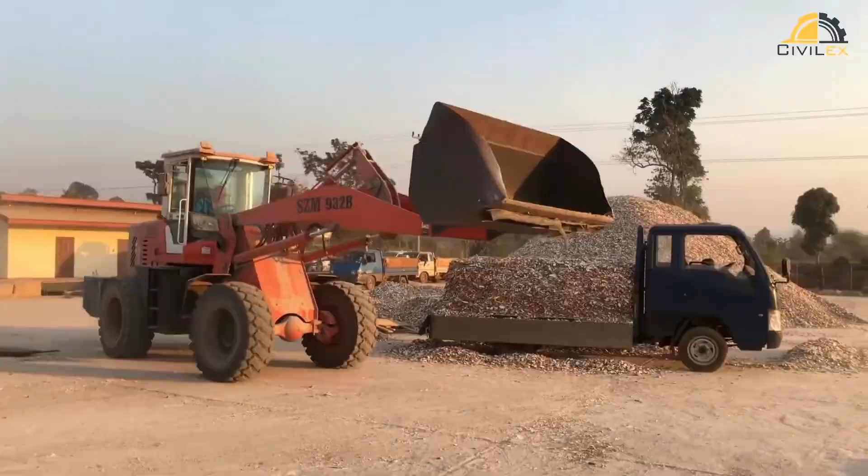At the same time, there is another serious issue, which is plastic waste. Malaysia produces over 1 million tons of plastic waste every single year. Unfortunately, only around 24% of this waste is recycled. The remaining plastic ends up being burned, dumped in landfills, or worse, leaking into our rivers and oceans, where it causes long-term damage to our ecosystems.

Okay, in response to these findings, our group identified a key focus area where we can make a difference: material reuse and waste reduction, an approach aligned with circular economy principles. This focus area addresses two critical waste streams at once. First, construction waste, by rethinking the materials we use and replacing traditional bricks. Next, plastic waste, by incorporating recycled plastic into the building process.

The concept we propose is the use of plastic waste bricks. These are not only practical, but also promote circular use of materials. Here's how: they reuse non-biodegradable plastic, which would otherwise go to waste. They help reduce the pressure on landfills and prevent harmful plastic leakage into the environment.

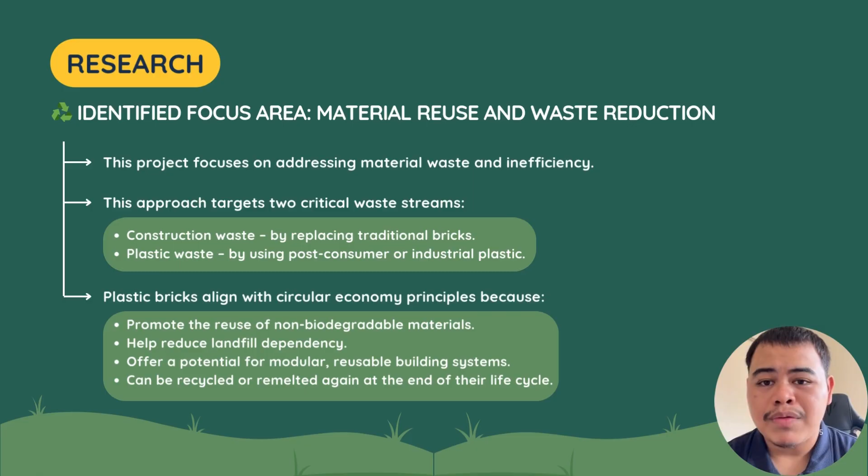And perhaps most interestingly, they can be designed to be modular and reusable, meaning they can be taken apart and used again, or even remelted into new forms at the end of their life cycle. In other words, plastic bricks help us close the loop, keeping materials in use for as long as possible.

Our investigation revealed two interconnected challenges that the construction industry in Malaysia must urgently address. First, the industry's over-dependence on traditional materials like cement and clay bricks. These materials require high amounts of energy and resources, are associated with large carbon emissions, generate significant construction and demolition waste, and depend on non-renewable resources.

Second, the country's growing plastic waste problem. With more than 1 million tons of plastic waste produced annually, we are recycling far too little of it. The rest is either burned, contributing to air pollution, dumped in landfills, taking centuries to degrade, or leaks into waterways, harming wildlife and contaminating ecosystems. This paints a clear picture, which is that unsustainable practices are deeply rooted in the way we build and discard materials.

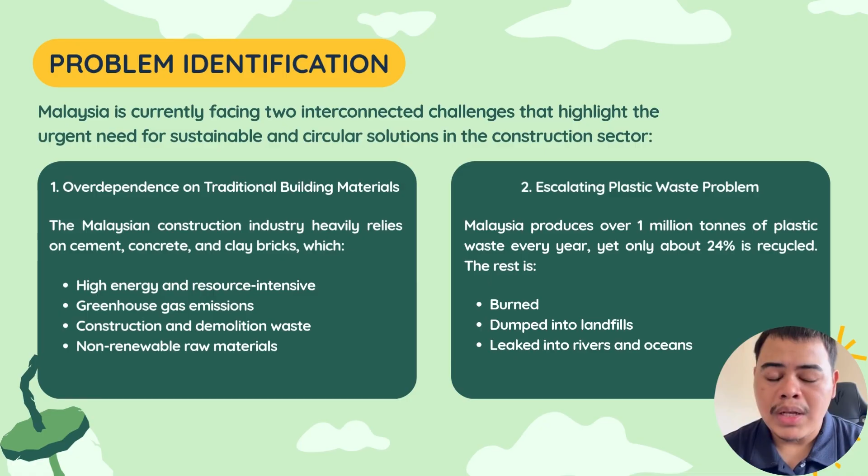So, what's the solution? Our team believes that one powerful response lies in plastic waste bricks, an innovative idea that tackles both material waste and environmental impact at the same time. This solution supports circular economy principles, where waste becomes a resource, not a burden.

By adopting this approach, we are not only helping to solve Malaysia's plastic problem, but also reducing our dependence on energy-heavy traditional materials. It's about building in a smarter, cleaner, and more sustainable way. Plastic waste bricks are more than just an idea. They are practical, scalable solutions that can transform how we build and how we protect the environment.

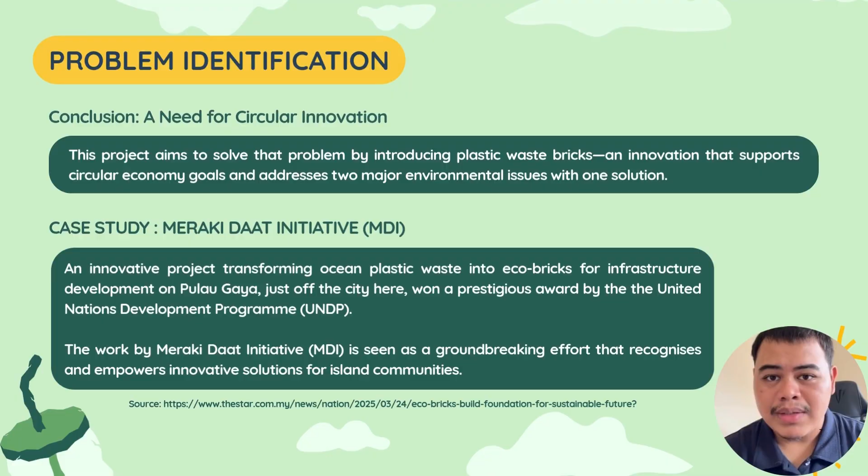Okay, so innovation development. What are plastic waste bricks? Plastic waste bricks are building blocks created by tightly packing clean, dry plastic waste into plastic bottles. This process turns plastic that would otherwise pollute the environment into a useful construction material.

These bricks can be used in a variety of building applications and represent a simple yet powerful way to reduce the growing problem of plastic pollution.

Why it is aligned with circular economy principles. So how does this innovation align with circular economy principles? Let's look at 3 key principles. Recycling. Plastic waste bricks transform non-recyclable plastic into a new construction material, giving waste a second life.

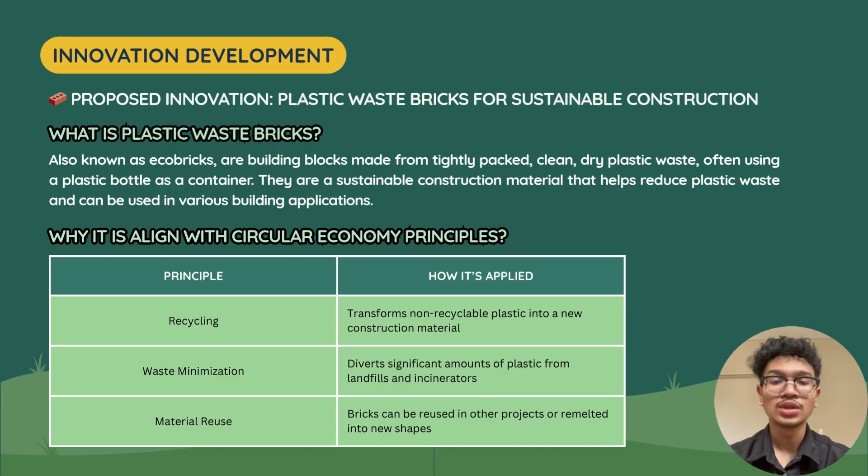Second one is waste minimization. They help divert significant amounts of plastic from landfills and incinerators, reducing environmental impact. And the last one, material reuse. These bricks can be reused in other projects or even remelted into new shapes, enhancing resource efficiency.

Okay, next we go to the implementation strategy. Now that we've explored the innovation, let's walk through the implementation strategy. How we can turn the idea of plastic waste bricks into a real-world solution. We have a 4-phase approach. The first phase, research and development. This is where the foundation is laid.

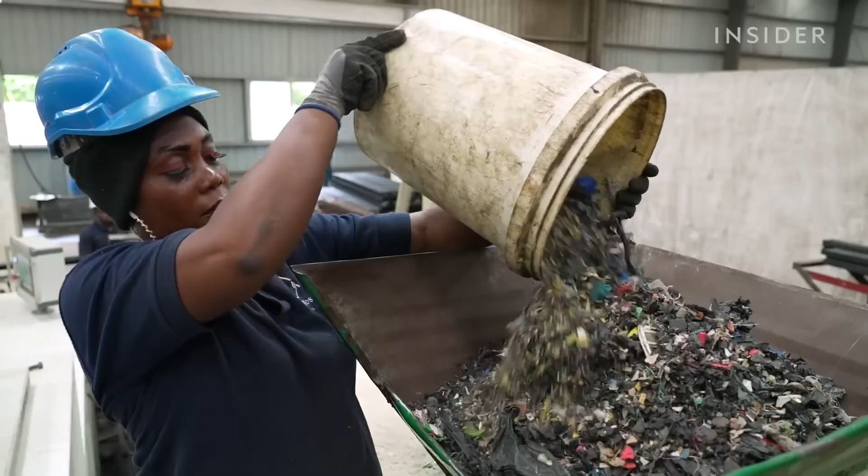We begin by testing different types of plastic and additives like sand or fly ash to find the best mix. Prototypes are designed and tested for strength, fire resistance and other performance metrics.

Phase 2, pilot production. Once the concept is validated, we set up a small-scale manufacturing unit. We use this to build sample structures like benches or walls and gather feedback for further product refinement. This helps us identify improvements before large-scale production.

Phase 3, scaling and certification. At this stage, we seek construction-grade certifications to ensure safety and quality compliance. We also expand the manufacturing capacity and build partnerships with construction firms and local municipalities to pave the way for larger adoption.

Phase 4, commercialization. This is where we take the product to market. We'll target green building firms, NGOs, and government housing projects. We use eco-conscious branding and set up a regional supply chain to distribute the bricks efficiently and sustainably.

Resource requirement. To bring this vision to life, we need key resources. First, equipment such as extrusion and compression molding machinery. Human resources, including engineers, material scientists, and factory workers. Next, capital, from seed funding, government grants, and green innovation funds. And last one, plastic sourcing through partnerships with waste management systems and community collection programs.

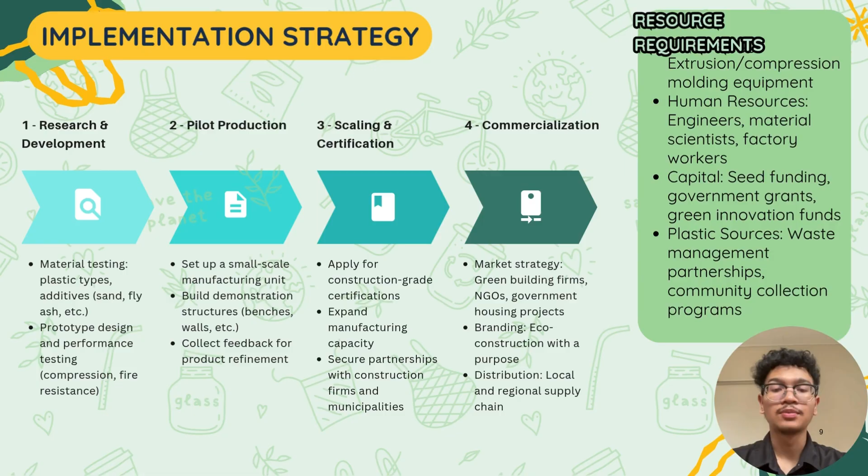Now, let's take a quick look at the cost-benefit analysis between traditional cement bricks and our proposed alternative, plastic waste bricks. Cement bricks rely on expensive, non-renewable material and require high energy for production, resulting in significant carbon emissions. This makes them less sustainable in the long run. On the other hand, plastic waste bricks use low-cost or even free recycled plastic. They consume less energy during production and drastically reduce carbon emissions.

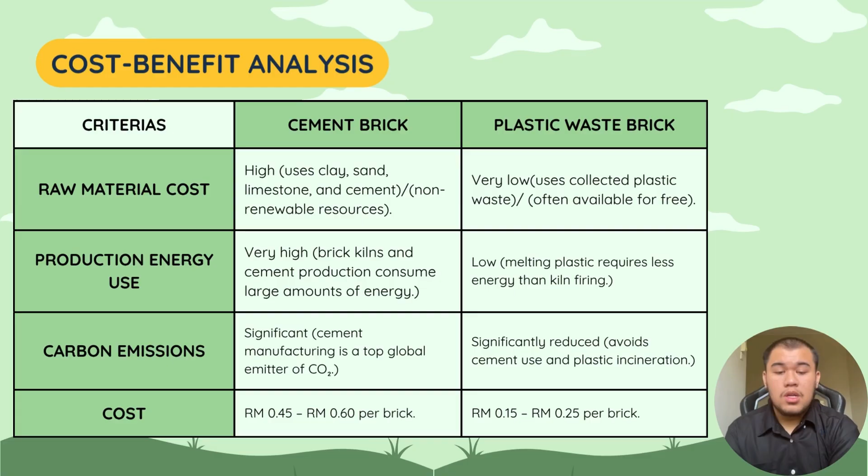In terms of cost, plastic bricks range from only 15 cents to 25 cents per unit, while cement bricks cost 45 cents to 60 cents per unit. In summary, plastic waste bricks are not only more economical but also a much greener alternative.